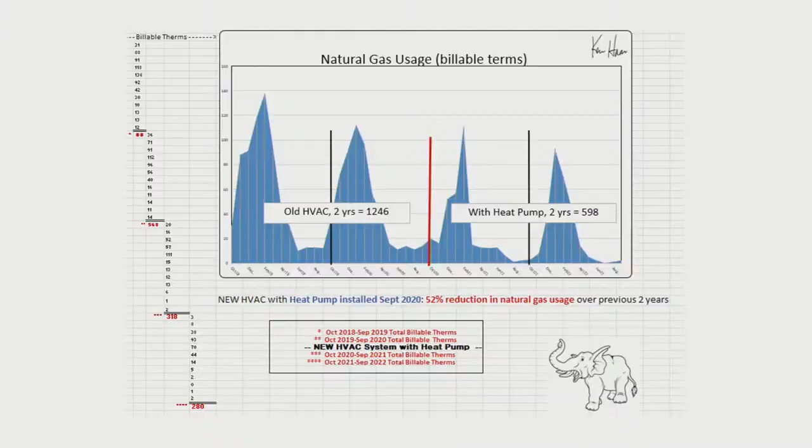I'll show you why in a minute. But as Mark will probably mention, this is causing problems - it's two sides of the coin. We want heat pumps, but it makes it a little bit more difficult to generate electricity because the peaks are coming at different times of the year.

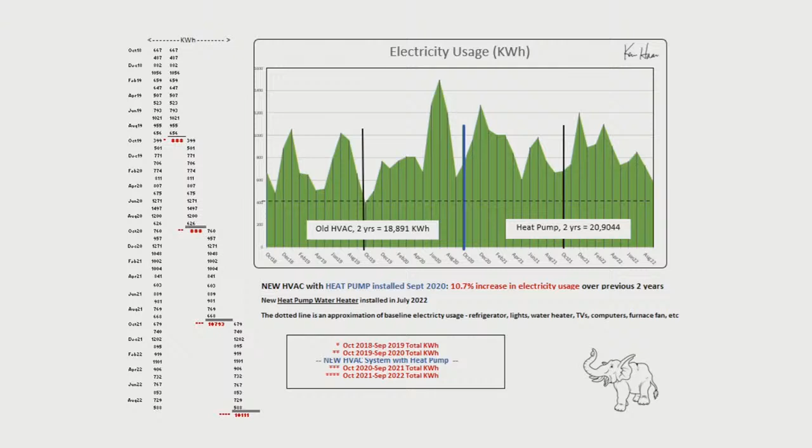Most of the time, the air source heat pump gives us the heat we need in our home. So that's the good news.

I'd like you to take, hopefully you picked up one of these little folders. Did you get one? Anybody else not get one of those little brochures? Could you maybe grab some and hand them out? Really, this brochure is all you need to know.

It's kind of a capsulation of everything you're going to hear today in much, much more detail. But the theme of this really is: don't wait until your air conditioner breaks or your HVAC system breaks.

Don't wait. Do some planning and educating yourself ahead of time. And then inside it talks about, and again you'll hear more about this, why you shouldn't wait, and who to call.

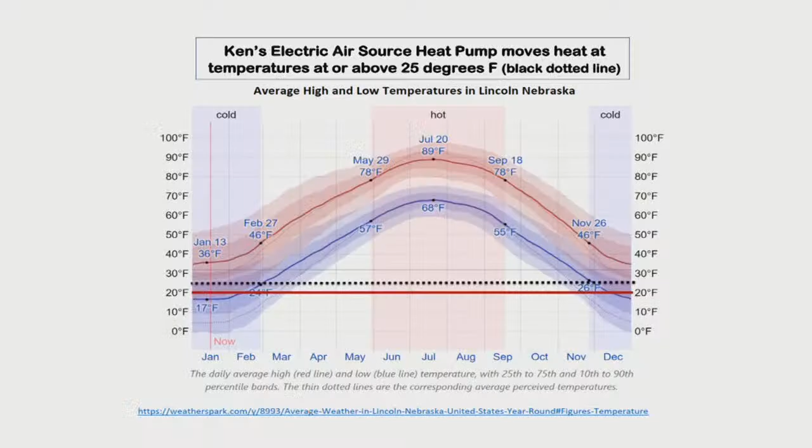Whoops, what did I push? Point towards that. Oh, maybe. Okay, here was kind of my adventure.

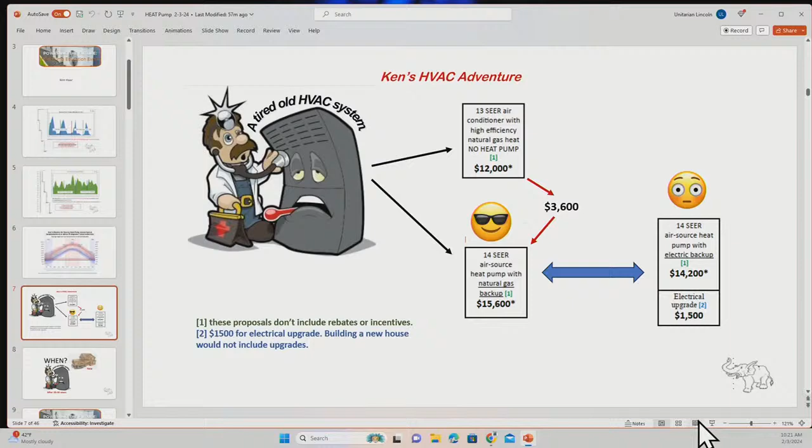We looked at the price of heat pumps, and we decided on that second one where the smiley face is, which was more than just getting a very efficient gas furnace. We decided to go that way. But I went with a gas backup furnace for when things get really cold, and for about the same cost now, we could probably have gone with an electric backup, and so we would be all electric when it comes to our HVAC system. When mine goes out, I'll have an electric heat pump and electric furnace backup.

In conclusion, my opinion is in the future we're going to electrify everything. So when your system goes out, know what you're talking about, think about it, ask questions, educate yourselves so that you can make a better decision, which some people might still want gas. There are places where electricity is so expensive where gas probably still makes sense. But my grandchildren, if they ever buy homes, will probably have all electric homes.

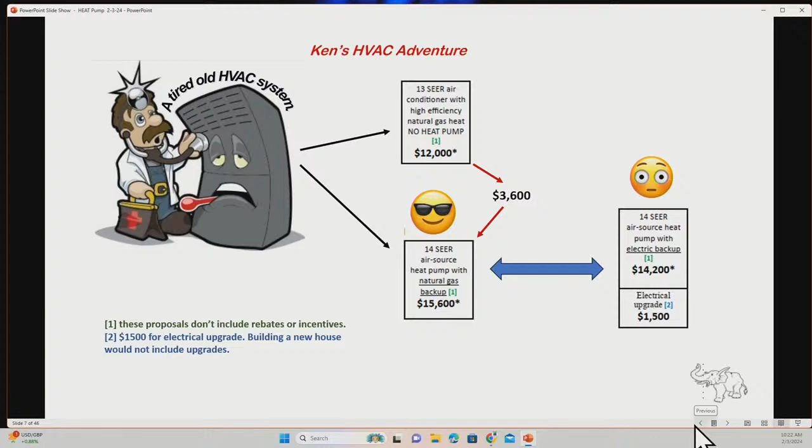Well, is there one single source that the city can find out about all of the incentives and credits? Okay, the question is, is there one source where you can find out about all the incentives and so on? Mark, right now I would say the phone numbers that we've given for LES, if Mark doesn't have your answer or one of his staff members doesn't have an answer, they will know where to point you.

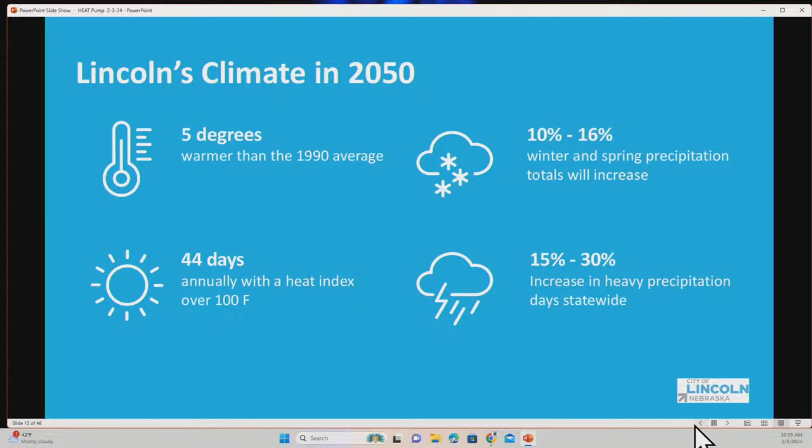And then we're also going to have an increase in heavy precipitation events. So you've probably experienced some of those extreme downpours where all of a sudden we just get a ton of rain falling in a short amount of time. So we'll probably be seeing more of that. We did an assessment of the risks that we face as a city, and these are the top risks that came through.

In 2019, we had the bomb cyclone event. We had major flooding problems. We almost had a water crisis here because our water pumps went out in Ashland. And then a few years later, much of the state was plunged into an extreme drought situation. So we're used to extremes in Nebraska, but those extremes are going to get more extreme and switch back and forth even more.

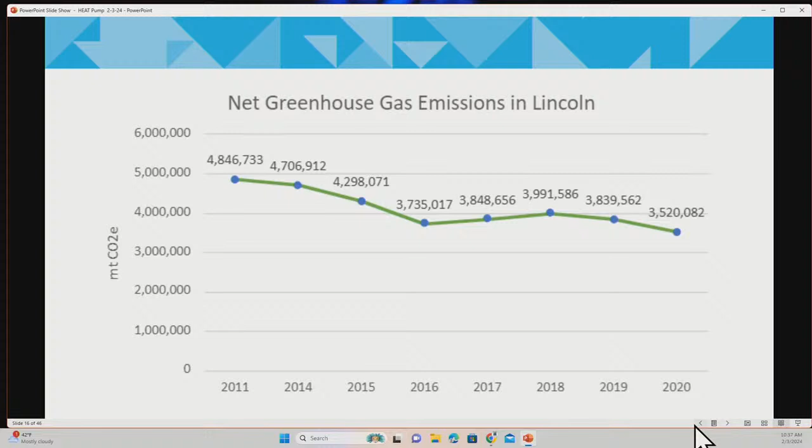So the way that we see climate action, it's more than just, I mean, obviously reducing greenhouse gas emissions is extremely important, but it's also more than that. It's really a holistic approach to how do we create economic opportunity? How do we relocalize our food system? How do we protect public health? How do we engage our community?

It's almost like we're in a crisis situation and we have the opportunity to reinvent ourselves or to improve our relationship with nature and with one another. And so it's really a broad view of how we do that. There is a big, hairy, audacious goal, as they say, in the Climate Action Plan to reduce greenhouse gas emissions 80% by 2050. So that is what we are working toward.

We also have some other goals in there. LES set a goal that they will have net zero emissions from electricity generation by 2040. We want to have our municipal buildings be net zero by 2040, and we are working to transition our fleet, the vehicles that the city owns, to 100% alternative fuel by 2040.

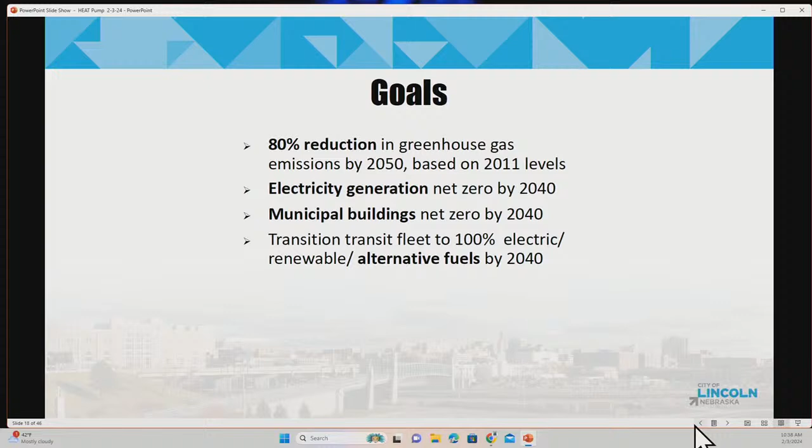We also adopted a local food system plan last summer, and also adopted an EV readiness plan last summer. We're about to start on a project to develop an energy management plan for our municipal buildings. We have a biochar initiative, and we're working on decarbonizing our fleet. It's just a lot, a lot of fun stuff going on.

So to get into more specifics about the heat pump program, we announced this program on January 4th, last month. And actually, that's the public part of the program. Last year, what we started with is we had a consultant do some study and analysis for us. And so I wanted to share just a few things that the consultants found in their study that helped us design the program. So they analyzed the housing stock that we have in Lincoln and our demographics.

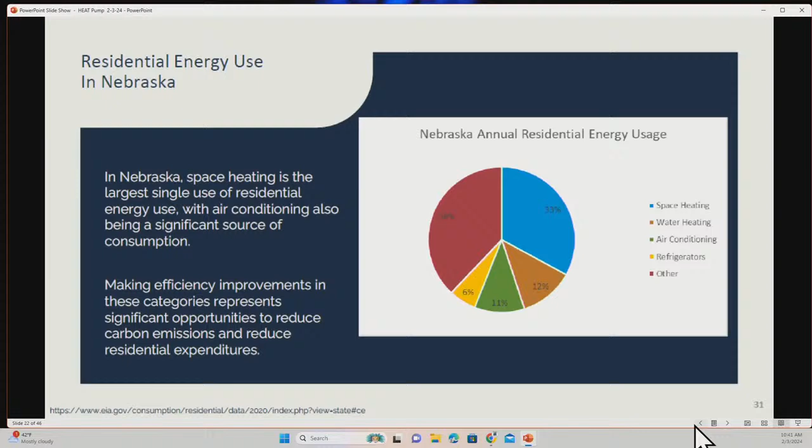So, not surprisingly, most HVAC systems that people have are using natural gas for their heating needs. This is residential energy use across Nebraska. You can see this is just energy usage, so this would be electricity and natural gas, but space heating is there in the blue. So 33% of our energy use goes to space heating, and the orange section is water heating. So there's a lot of energy going into heating needs across the state. That means there's an opportunity to make some changes there too.

So this slide shows the comparison in fuel costs and life cycle, 15-year life fuel costs, between an air source heat pump or an air conditioning natural gas setup, which would be a more traditional setup. So you can see in the table that the annual fuel costs for an air source heat pump, granted fuel cost means electricity cost also, would be $729 compared to $819 for a traditional system. And the 15-year life cost would be $10,935 for an air source heat pump compared to $12,285 for a traditional system.

In terms of the carbon dioxide reduction, the annual reduction from an air source heat pump is 2.87 tons of carbon dioxide, and over a 15-year lifespan, that would equate to 43. No, that's not over 15 years. It's just lifetime. I'm not sure what a lifetime span is, but 43 tons of CO2 over a lifetime. So the average difference in cost between the two systems is approximately $1,700, and the 15-year difference in energy cost is approximately $1,350.

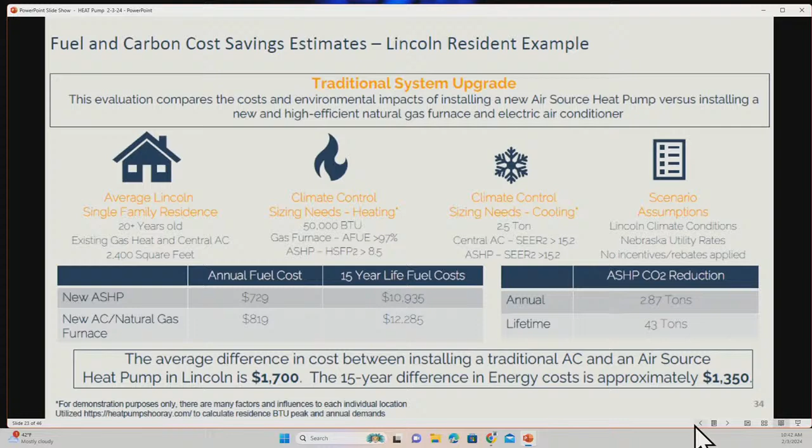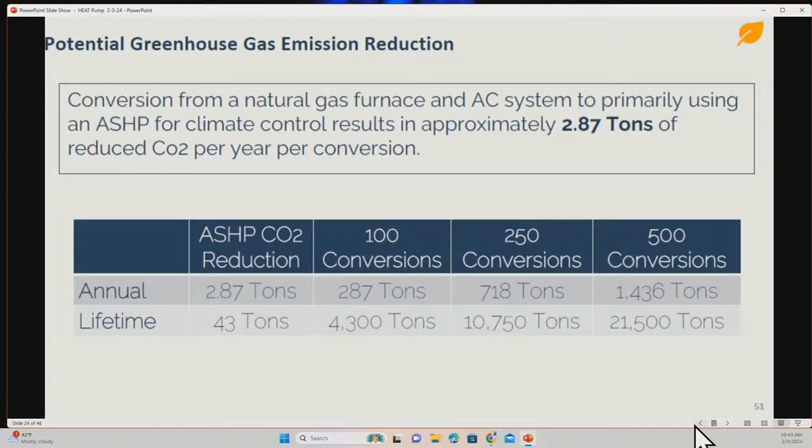And so here again, the annual CO2 reduction for just one air source heat pump would be 2.87 tons. But if, as we were thinking of designing this program, we could get 100 people to convert to air source heat pumps, that would equal 287 tons of CO2. Or if we got 250, that would be 718 tons. And then you can see the equivalent numbers over the lifetime that adds up. It's still not significant numbers compared to all of our greenhouse gas emissions as a community, but it's still an important step in the right direction.

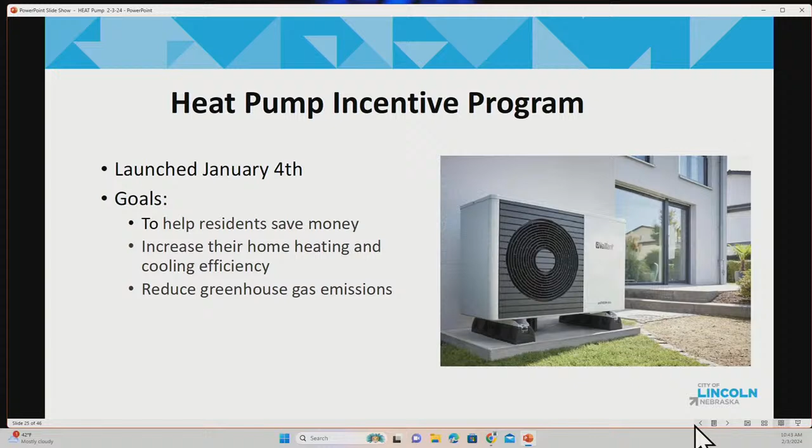So to describe our particular program in detail, it launched January 4th. The goals are to help residents save money, to increase home heating and cooling efficiency, and to reduce greenhouse gas emissions. So the city is offering a $1,000 incentive for the general population, or a $3,000 incentive for low and moderate income residents. And to qualify for low and moderate income, their annual income has to be 80% of the area median income, which I don't have that figure right at my fingertips, but it's a federal guideline. We do have a worksheet on our website.

It depends how large your household size is, but you can look at the table and see if you might qualify. And then you could work with our team in the urban development department to qualify for that incentive. But either of these can be stacked with LES's existing $800 incentive and the federal tax rebate of 30%. So low-income folks could get a maximum of $3,800 plus a 30% tax credit, or $1,800 plus the 30%. So it's a pretty generous incentive altogether.

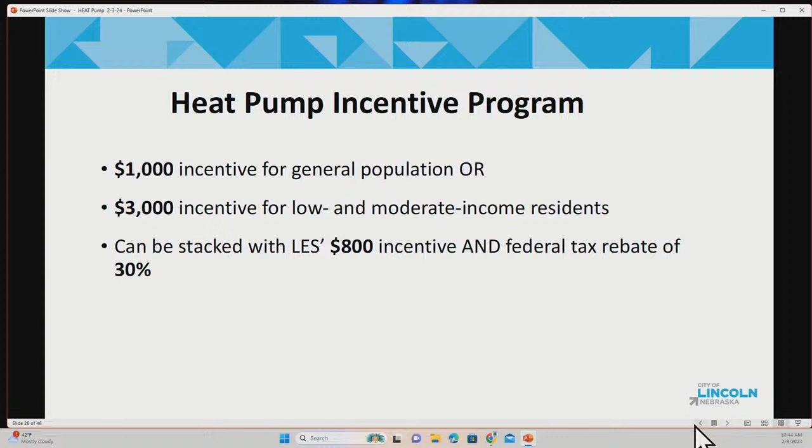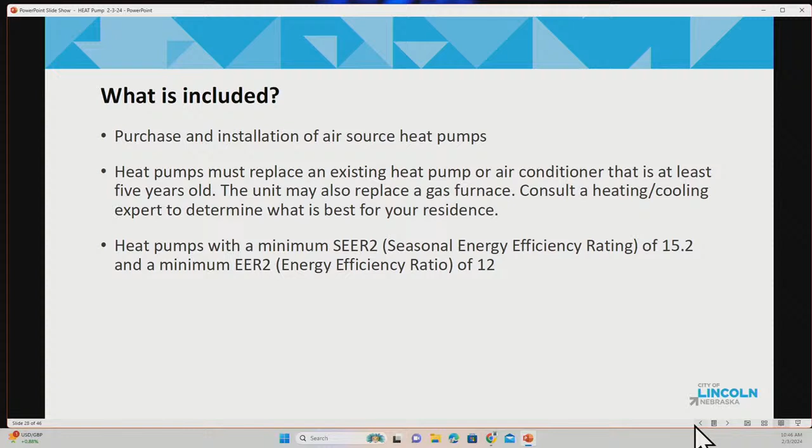So what's not included: any home outside of Lincoln city limits, commercial, multifamily housing. This is also not for ground source heat pumps. Ground source heat pumps are awesome, but again, we just decided to focus for now on air source heat pumps. And new residential is not included as well right now. So how does the program work?

It's super easy, thanks to the design LES already had in place. Basically, you would contact your HVAC contractor and say, 'I'd like to put in a new heat pump,' and your contractor takes care of the rest. They're enrolled in a program through LES, and LES will give the incentive to them.

Your discount will just show up on your invoice from your HVAC contractor. You can go to les.com/SEP to see the list of participating HVAC contractors and more information about the program. You can also email sep@les.com with any questions. Just contact one of those contractors to get a bid—you might want to get a couple of bids—and then install your new heat pump and you're ready to go.

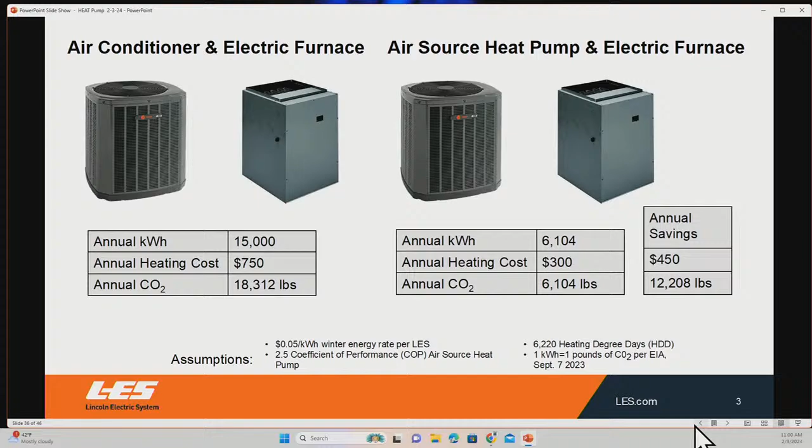The technology works. Technology works. The first one went in, in 1975, so this isn't novel. The heat pump's been around a long time. Now what is more recent is the advances, the variable speed equipment that makes it more efficient.

It's improved. They do extract heat in Minnesota. They do extract heat in Maine. But you do need an auxiliary heater. The best case in point is what we just endured two weeks ago, when we might as well have been living at the North Pole. The heat pump will not provide sufficient heating in those elements.

And if you've been studying the patterns of weather, that seems to be the new winter normal: warm Decembers, a polar vortex that knocks your socks off for two weeks, and then a return to warmer than normal weather, which we're about ready to go into, we are into. So it's getting through the bitterly cold. The heat pump technologies aren't there to get us through minus 18 degrees. So you need auxiliary heat. You need auxiliary heat.

So the Inflation Reduction Act has been mentioned as a way, because I talked about crossing the chasm, and the miseducation that folks have about heat pumps, that they don't work in really cold weather. Heat pump is an odd term because it doesn't explain that it's an air conditioner and a heat source, but whatever. Cost is another big one.

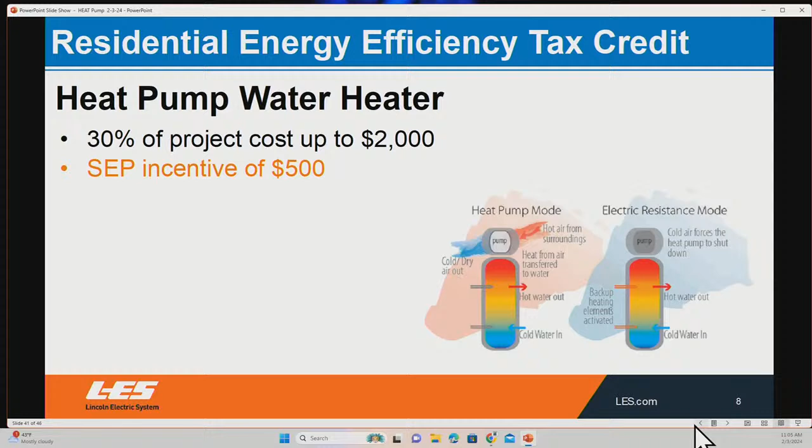Now, Ken alluded to the fact that down the road, there will be an additional program, and it is a point of sale rebate program, not a tax credit, where if you meet the income guidelines, you will get a rebate at point of sale for the purchase of any of these technologies. That is being funded by the federal government, but administered by the state energy office, and they are in the process of designing that program.

It's a big lift because all of these are point of sale. That means they have to create a system that verifies what your income is and then works with the contractors to provide point of sale. That's a fairly large lift, and that's why it may be until early 2025 when this rebate program goes live. But it will obviously be a potential game changer in helping us cross the chasm.

Here are some resources. If you want to learn more about electrification and the move towards advanced technologies, Rewiring America is a great resource. Energy Star, and all these others. LES.com is where you need to go to learn more about heat pumps.

You've got a rebate of $4,000 if you're in an older home that has a small service entry, maybe 60 amp service and you want to go to 100 or 200. There's resources for that, for rewiring. I've got my daughter and son-in-law who have knob and tube wiring in their attic. They can't get that insulated. They'll have to rewire.

So less than or equal to 80% AMI is up to 100%, and 81 to 150% area median income, 50% of those. So it is income based.

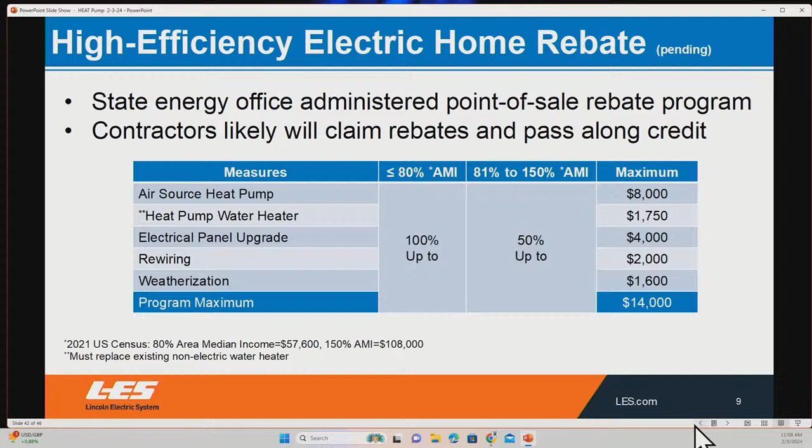Yes, sir. Is there any idea of moving forward to a progressive-based incentive program rather than just having a minimum SEER, since SEER levels increase and you can get a bigger bang for your buck with a 20-SEER unit versus a 14-SEER unit? Can you get more incentive?

We did have that, and before we switched over to meet the federal tax credit minimums, we lowered the amount for the minimum or first cut, and had a little higher for the next cut. We heard both good and bad on that.

Could we change that in the future? Sure. But again, we had feedback that said we like simple, whereas some people said you need to give a little more if somebody goes to a 20 SEER unit. So they're both merit-based. We just decided to keep it simple as we started.

Yes, ma'am. So I'm just trying to figure out, when you just say blanket 30% federal tax credit, that's a lot different than 30% federal tax credit up to $2,000 when the cost is $14,000.

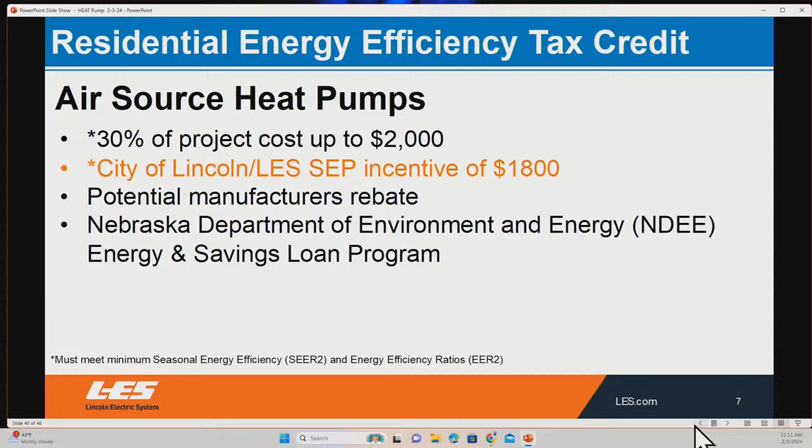This is the federal tax credit we're talking about. That means you take 30% of the cost, and the federal tax credit cannot be more than $2,000. I can understand why this gets confusing. Today, anybody in this room can take a 30% federal tax credit, assuming you have a tax liability, right now. That started last year, and this will run till 2032, I believe. There are no income requirements - nothing to do with income. The only thing that has to do with income is that rebate program I told you that isn't even out yet. So you take 30% of the cost: if it exceeds $2,000, it's capped at $2,000; if it's less than $2,000, then that's what it is. Afterwards, if we want to get together and talk in more specifics, I'd be happy to do it, because it gets confusing.

No, it won't be. No. It'll almost always be that full $2,000. I think you're right.

Anyway, I am happy to be here because I've been able to learn quite a bit to get here today - I had to learn some things. And I do have some breaking news that should go at the top of the sheet here. As I looked back on my history with heat pumps, I realized that I'll be talking about my own heat pump experience, but in 1975 I had actually had installed in a house in Lincoln a heat pump - 1975, which is 49 years ago. An early adopter, yes, except I didn't have to take the chances.

So yesterday I made a cold call on that house just to see how things were going, because I really hadn't been back there for the present owner. A nice man came to the door, and I said that I'd worked on the house 50 years ago, and I asked him, well, how's your heat pump doing? At that point I didn't know what to expect. I thought he might say, well, you know, the first thing we did when we moved in here 30 years ago was tear that damn thing out and put in a gas furnace. I just didn't know. But he responded that he still had the heat pump running.

They'd replaced it once - he couldn't quite remember when, so I went to Building and Safety, and they had replaced it in 1983, the inside unit and the outside unit, which is 41 years. I think there probably was an outside unit replaced before then, but he didn't remember it, and he'd been there 30 years.

So the question is, do they last? Well, I guess that one does, and that's anecdotal data, of course. But if you put enough anecdotal data together, you get data. That's what I have in the rest of the sheet here, data from my own experience.

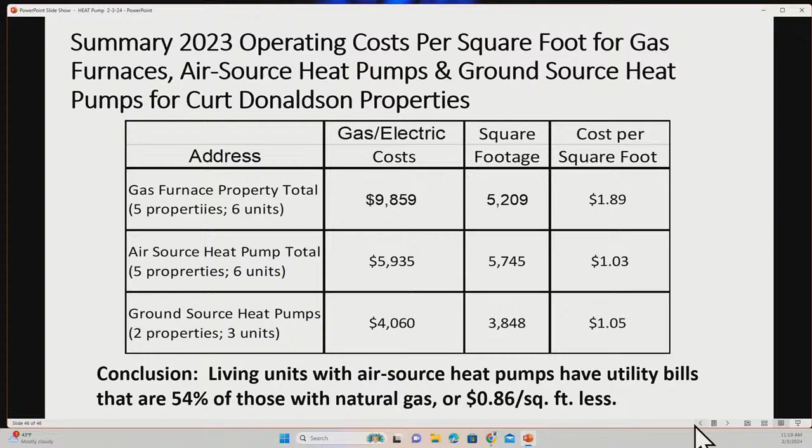Yeah, it's on the sheet because I couldn't get it on one PowerPoint. I'll mention this duplex at 1445 North 25th Street was built in 1888. It's my oldest house, and the reason for the difference between the 88 cents and the $1.07 per square foot is...

...that the heat pump water heater is on the meter for the downstairs unit. That's just the way it is. It only costs $120 a year to operate that water heater, so people get along with it. But very happy with the performance on those units.

2900 R Street is a similar situation. It's the second floor unit, 83 cents a square foot with an air source heat pump, and the gas water heater is in the lower unit. So they've got a pretty good deal.

You might ask, if these are upstairs units, is the downstairs heating the upstairs? Well, a bit, but in all the units I've actually insulated between the first floor and the second floor, sometimes as much as 14 inches of insulation, but always at least R19 between the units just for sound control. The ceilings float, they're separated. So, done what I can.

Anyway, so we see that the average square foot cost on the air source is $1.03 versus $1.89 a square foot. Now we get down to my favorites, the ground source heat pumps. I've never been much of an evangelist for air source heat pumps because I believe in ground source heat pumps.